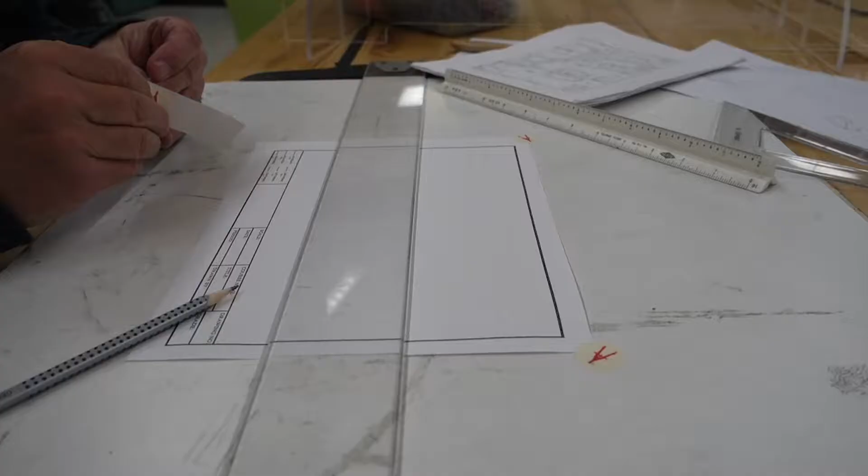Now, the first step is to get the paper just right. And so we get this T-square firm up against the edge of the drawing board, and then we line up the paper not to the edge of the paper, but to one of the borders. And then we are fortunate that we have drafting dots, which are very tidy and handy to use. But if you have regular tape, remember, don't set it at an angle that can tear the corner off. Right? And we're going to want to check it before we wreck it because the paper may shift as we go.

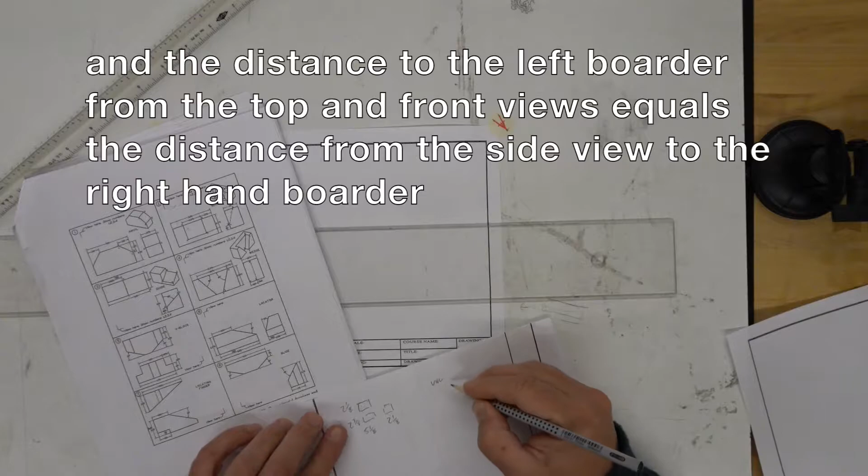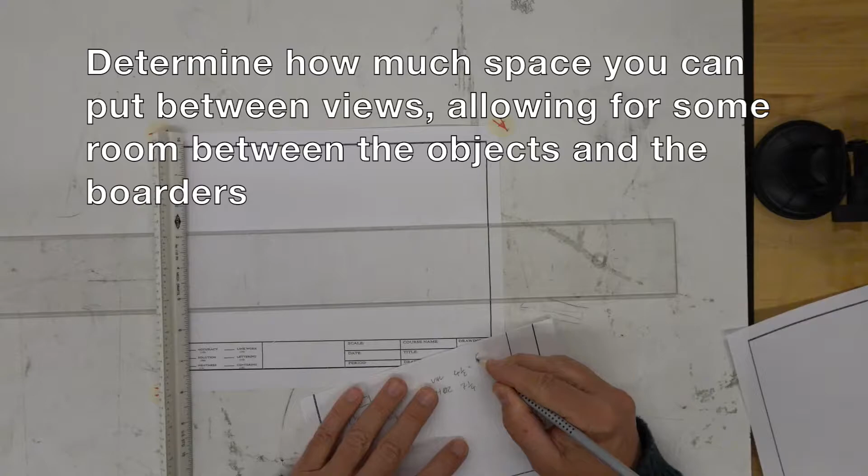It's time now to plan the layout. And our goal is to have the views align with the top view directly above the front view, and the side view directly to the side of the front view, the space between each view being the same, and the space above and below the front and top views being identical, and the space to the side of the views to the border being identical. And that's going to require some math.

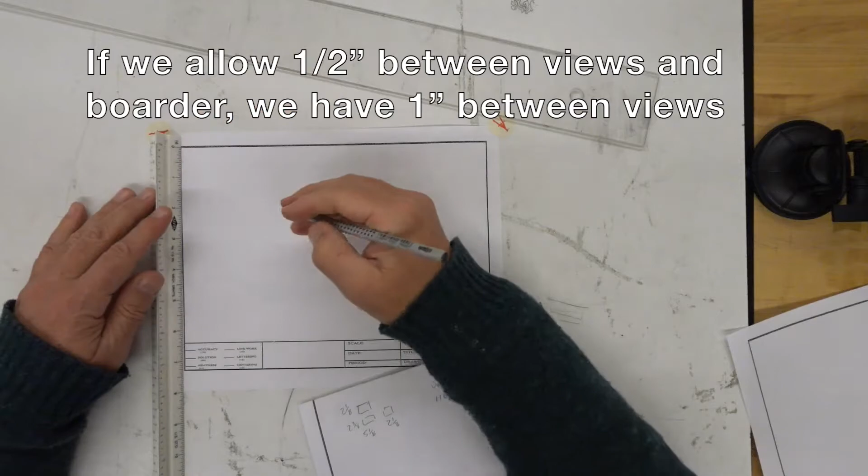We'll start with the vertical. We've got 6.5 inches of space to work with, and when we subtract the depth of the top view and the height of the front view, we have 2 inches. We want some room around the border, at least 3/8, so it doesn't get crowded. I'm going to go with a 1/2 inch, and then that'll give us an inch between views, which is tight, but we have to make do.

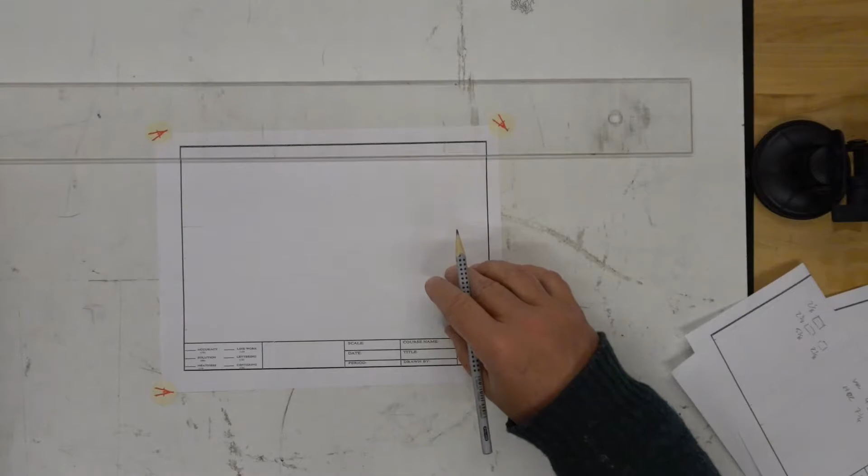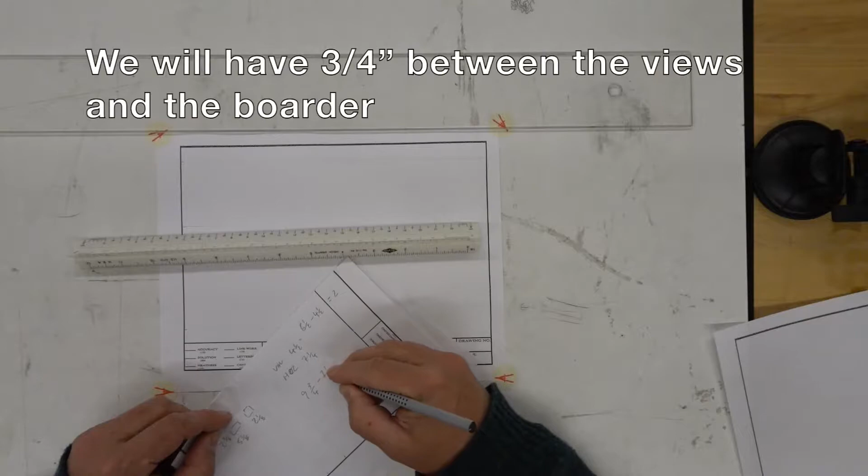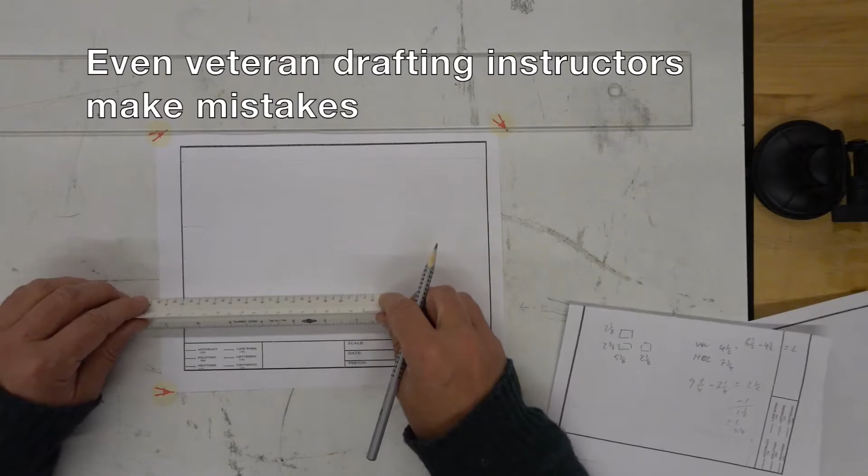Having established how much space we have between views, we'll use this to calculate the horizontal, which has a lot more wiggle room, if you will. And we find that 3/4 of an inch between the views and the border. Now we're going to lay everything out with some very nice light construction lines so we don't have to erase them later, so that we know where we want to locate the views. And then finally we're going to check it to make sure that we haven't made a mistake because we're human.

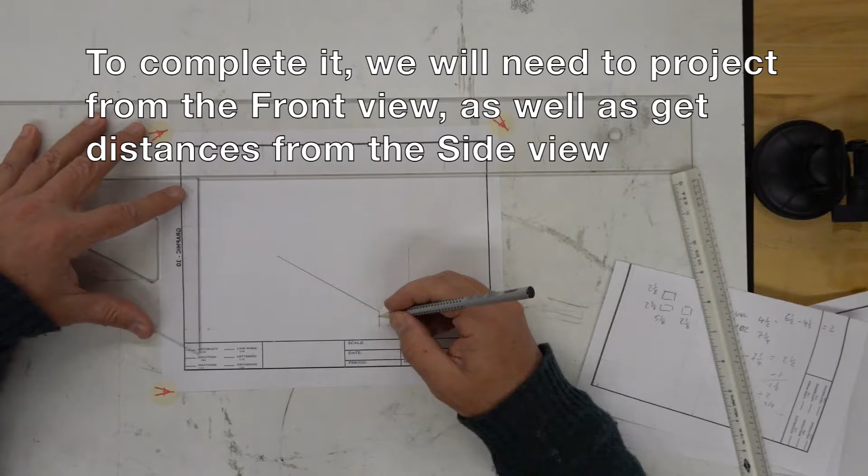It's time now to draw the object proper. And the front view and the side view are relatively straightforward with known measurements and angles. The top view, on the other hand, is a different animal altogether, and some of the information we don't have directly. So we have to draw the front view and the side view first, and only then can we complete the top view.

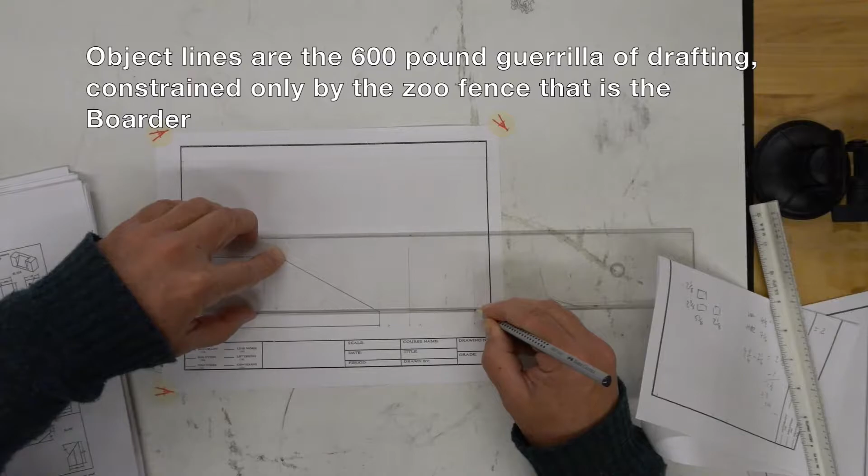Also, please remember to keep your T-square and your triangles tight against each other and the edge of the drawing board. That's the T-square. Otherwise, error starts to creep in. Please remember to make your object lines bold and strong. All right, again, we project over because whatever happens in one view happens in the other views, just differently. So you can see I'm keeping the triangle nice and tight against the T-square and the T-square tight against the edge of the table.

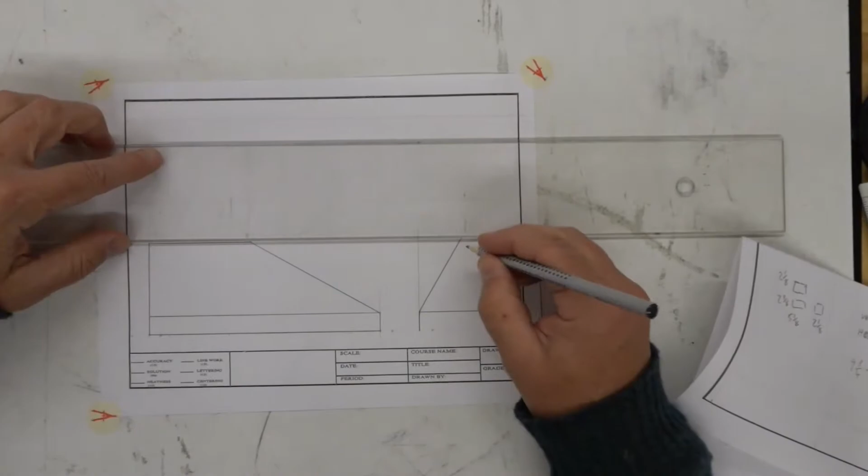And now we'll get this nice tidy angle. I know where to stop because I have nice construction lines to tell me how far to go. I often find it's easier to work off the bottom of the T-square because you can see where you're working more readily. And now we'll do the top view, and we're going to project that key inflection point, and we're going to use the scale. Dividers would be easier, but we don't have them at the moment, and measure how far over that top surface goes.

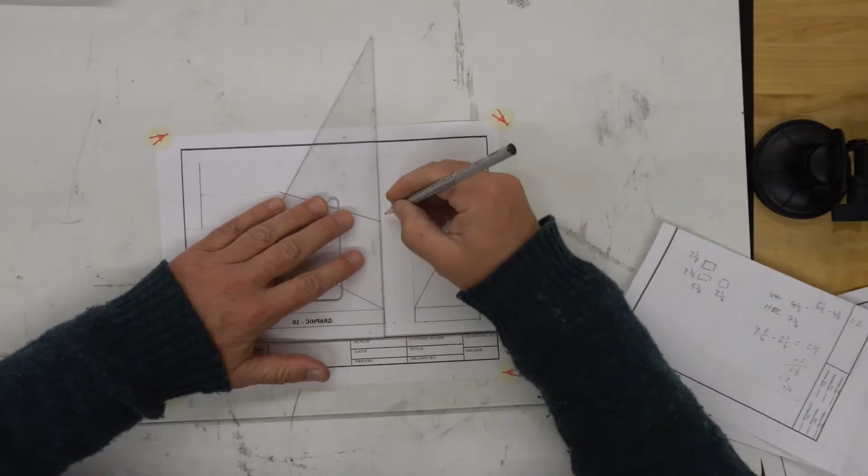And I'm going to stick with some construction lines at first. And now this angle is connect-the-dots time. Right? It's an irregular angle, if you will. It's not a 30, a 45, or a 60. And now we can complete the rest of the top view. Something I wish to share with you: it is better to put the pencil right where it needs to be and bring the triangle, as I just did, to the pencil than bring the pencil to the triangle.

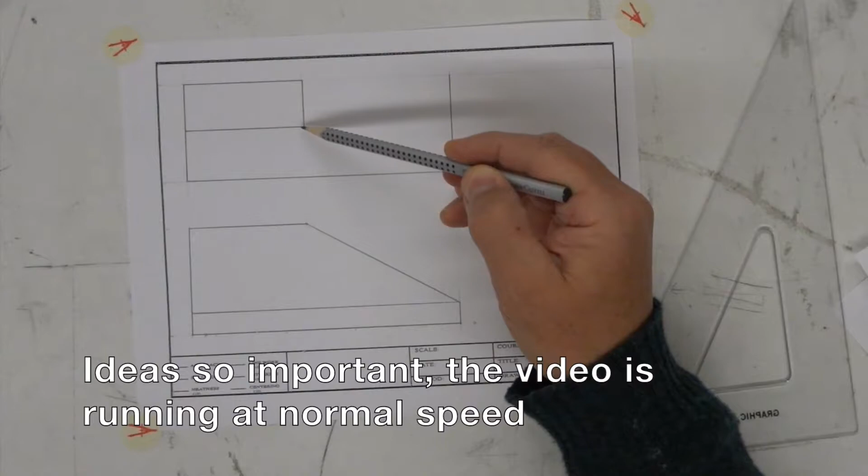And, oops, I forgot to continue the object line. I will fix it later. But let's review this key idea. It's only from that inflection point where the angle starts in the front view that we can locate it in the top view and then get everything squared away.

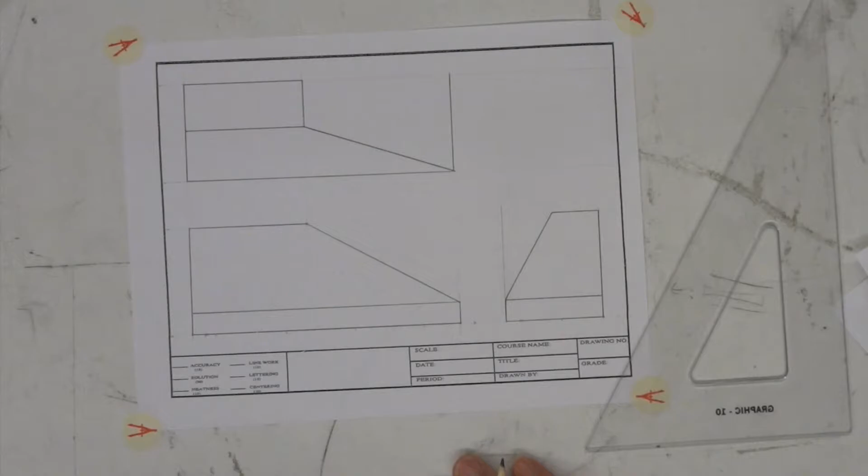And the other thing about this is if you ever start doing developments, this is why, because we don't know the actual shape of those surfaces from this drawing, and we'd have to do an advanced technique called a development to learn that. It's a lot of fun. Drafting's a puzzle, and I'll now fix my one mistake.

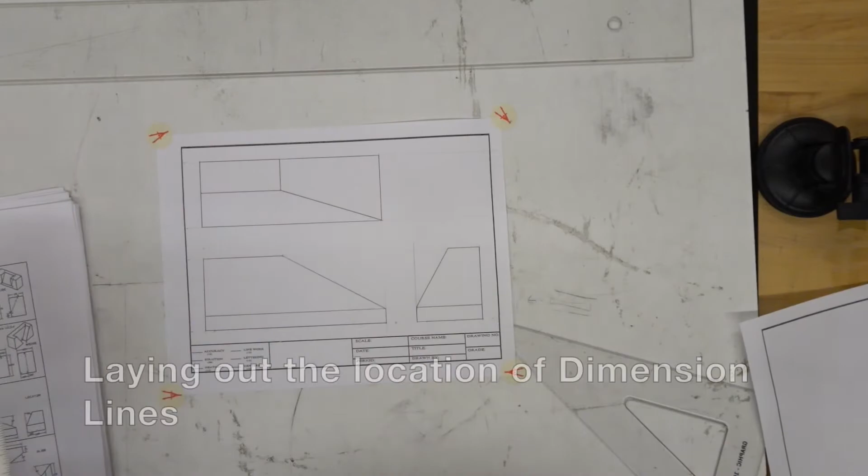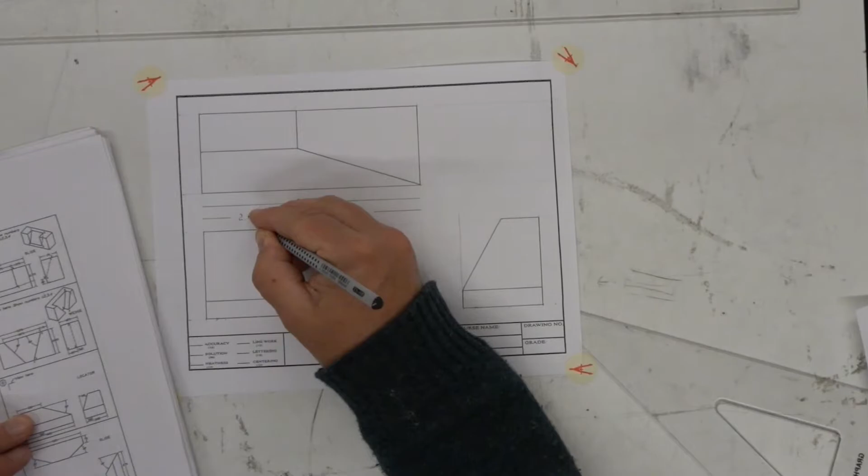Time to dimension our project. And this is where we go from this is what it'll look like to, and here's how to really make it, because you need dimensions to make something properly. So we've got a combination of dimension lines which show where dimension starts and stops. We have extension lines which show where it's going to, as it were, and then we have the dimensions proper. And of course, later on, we'll be adding some nice pointy arrows, stabby, not big spoon-like things.

As we dimension, try and keep it as neat and as tidy as possible. Remember, the idea is this has to be legible even after it's been reproduced. So we need absolute clarity and very tidy lettering.

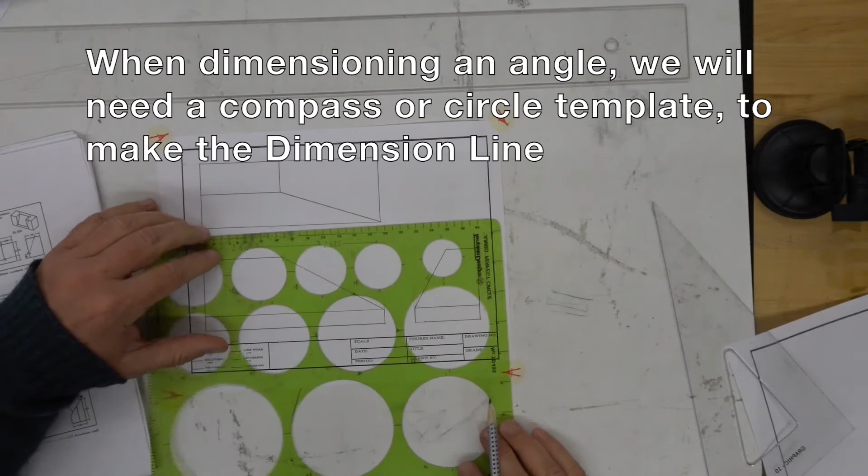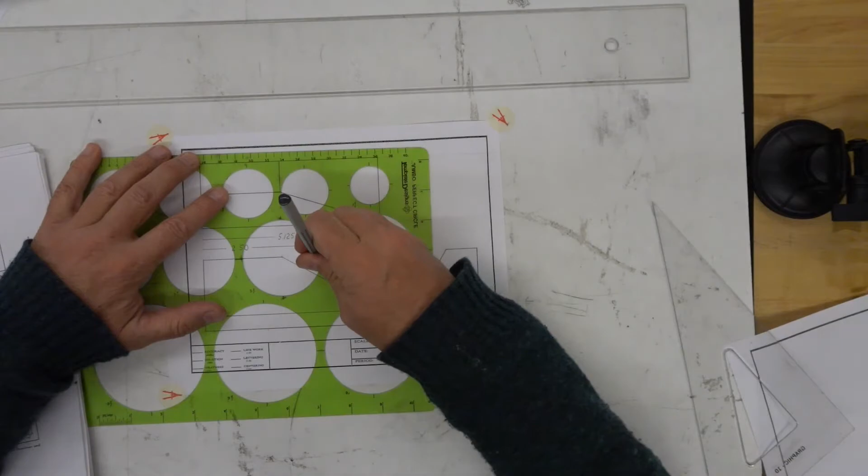The dimension lines for angles are not straight, but rather an arc. So I'm using a circle template, and I'm going to figure out which of these circles is probably the best choice to get the dimension to land about where it should be, so it's not too squeezed, as it were. And then the center of the circle, whether it's a compass or a template, is the inflection point or the start point of the angle. And later on, I will add an extension line.

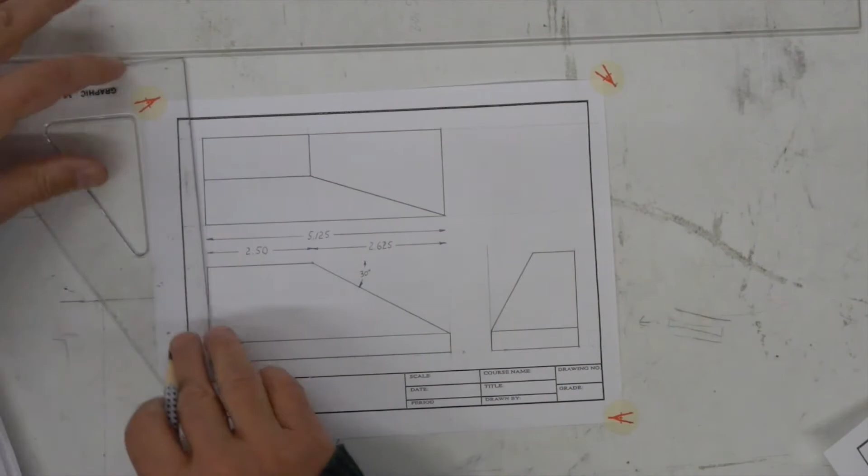Continuing on with our dimension, you can see I'm adding the arrows. And you should be able to do it with 3 lines, 2 pointy ones and then one sort of line to fill it in. And I'm adding the extension lines. And you notice they don't quite touch the object, right? And they shouldn't be quite as bold and strong as object lines to help differentiate them. And double check your work, because check it before you wreck it, right, kids?

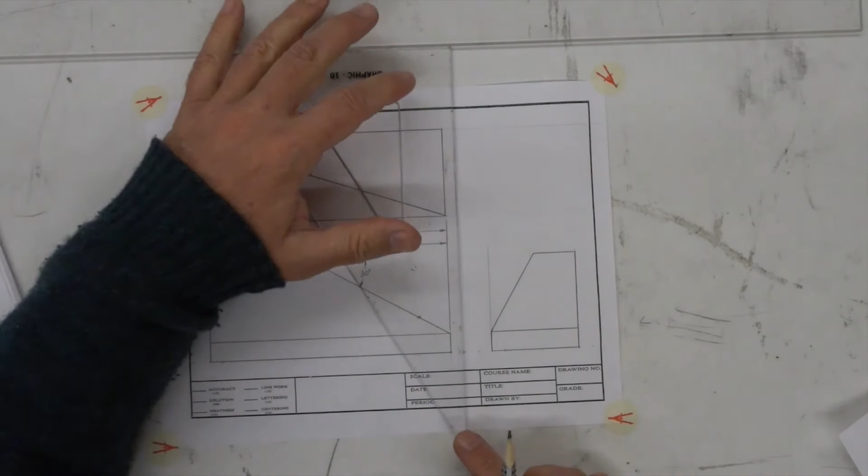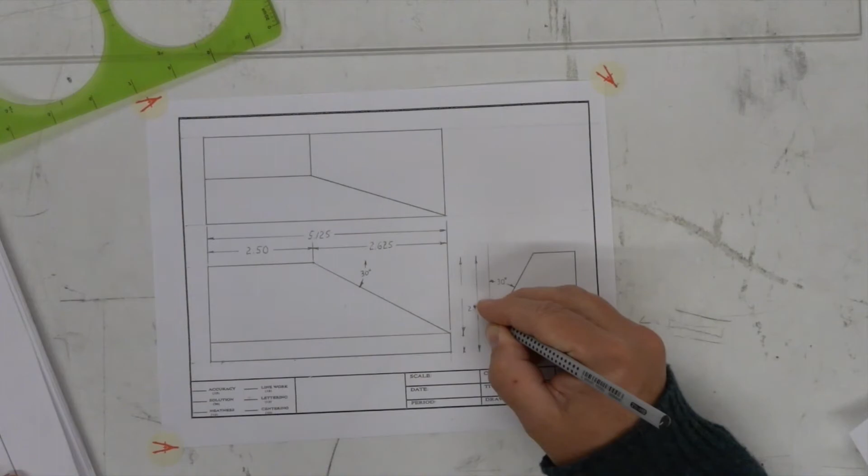Okay. As we come up, we're going to be a little squeezed on space, so let's talk about some solutions. One way is how you orient the numbers for your dimension. And while it's nice to have vertical dimensions have the lettering go vertically, you can also put them horizontally if need be. Another thing you can do if there's not enough space is you can actually put the arrows outside of the dimension. We won't see it here, but I think you will see it another time.

And then finally, if you're totally squeezed on space, you actually place the dimension outside of the dimension line and 2 small little arrows to say, well, it would go in there, but it doesn't fit.

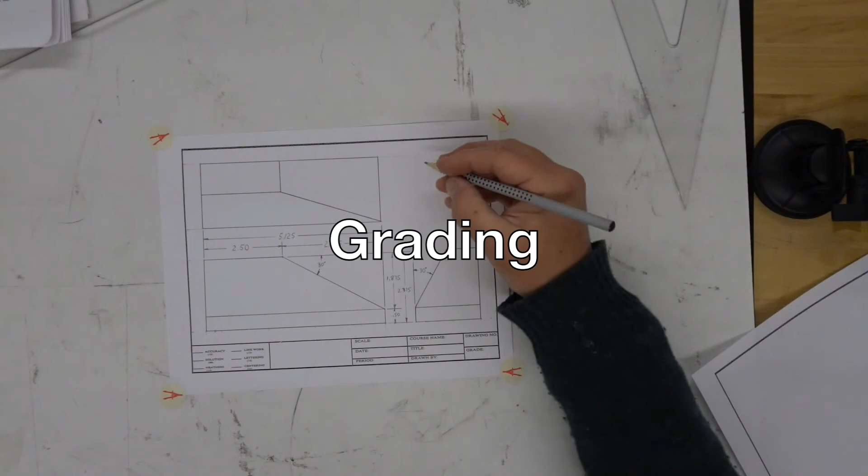Okay, time to grade, because we get better by reflecting and evaluating our work. It's very important to get a drawing to be super neat, and I'm going to be a little stricter myself than I would with the student, but there are a few things I really should have chased down with an eraser and erasing shield. Complete, I'm solid. You would expect that from an instructor.

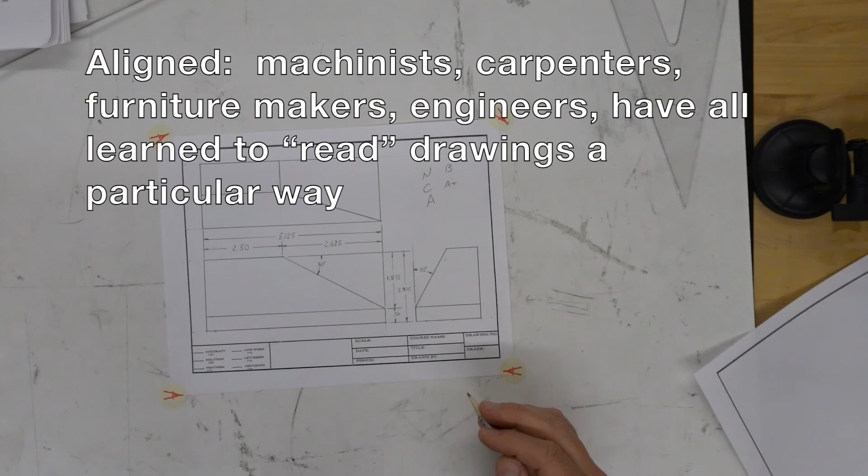Aligned is pretty good, except there's that one extension line, but we'll count that as a neatness issue, so I've now earned a 95. And again, in drafting, theoretically, there's an ideal perfect drawing, and we're chasing that perfection, which is a very different thing from many of the other activities out there.